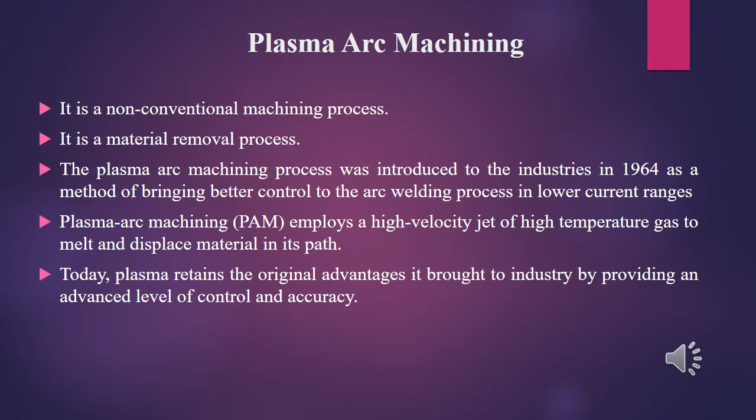The plasma arc machining process was introduced to the industry in 1964. It uses a high velocity jet of high temperature gas to melt and remove material from the workpiece. Due to its high control and accuracy, it has an advantage over many other machines.

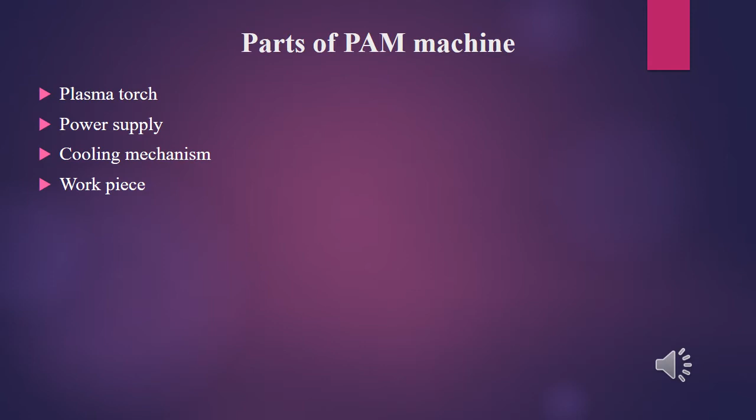Plasma arc machine has four main parts. First is the plasma torch, second is the power supply and cooling mechanism, and last is the workpiece. So we will look one by one at the detail of these parts.

As we are discussing plasma arc machining, we have to know how the generation of plasma happens in this process. We know that for the generation of plasma we need high enough energy. This high enough energy can be brought by an electric arc that can be produced by a plasma torch. The construction of the plasma torch is such that it can provide an electric arc between an electrode and the workpiece. We insert some gases that can be ionized, like nitrogen, argon, hydrogen, or a mixture of these gases. The plasma arc ionizes these gases and produces the high temperature plasma state in this process.

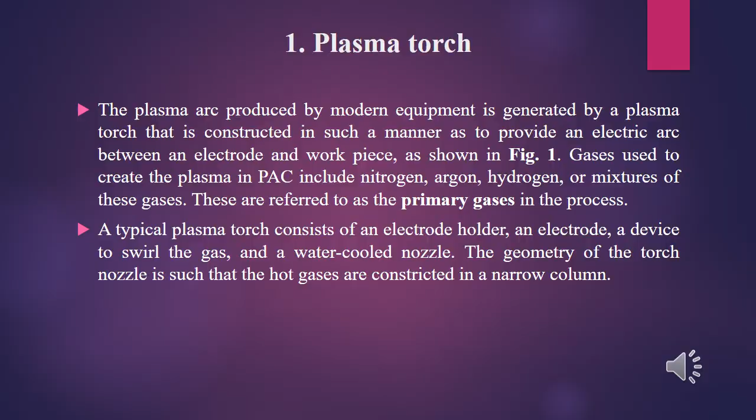A typical plasma torch consists of an electrode holder and an electrode, a device to swirl the gas, and the water cooled nozzle. The geometry of the torch nozzle is such that the hot gases are confined in a narrow column. The advantage of this constriction of the hot gases to a confined column is that it can increase the intensity of the plasma state, which is beneficial for us.

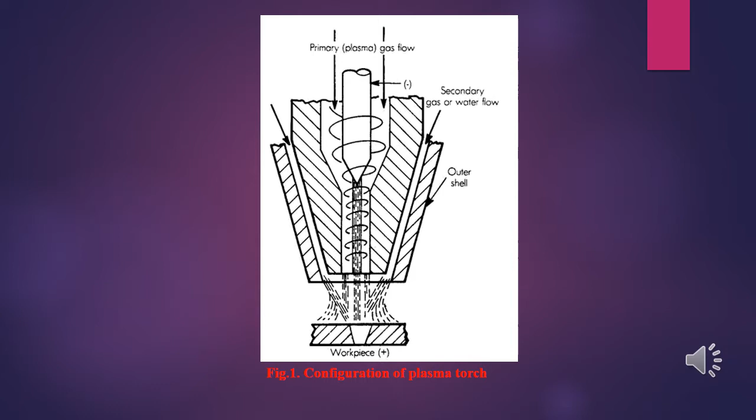This is the simple configuration of a plasma torch. We can see here an electrode used is a tungsten electrode, and there is a swirling action. Plasma gas flows in a swirl pattern around the electrode through the nozzle orifice, ensuring the proper arc attachment point. We have a primary gas and a secondary gas. There is an outer shell, and the intensity of the plasma beam can be increased by a constricted straight motion of the plasma.

The second part of plasma arc machining is the DC power supply. We know that a tungsten electrode is inserted in the plasma torch. So to create the plasma arc, we need a high enough potential difference. How is this potential difference created? We attach the negative terminal of the power supply to the electrode in the plasma torch, and the positive terminal of the DC supply to our workpiece. In this manner, we can generate a potential difference, and an arc can be produced between the electrode and the workpiece.

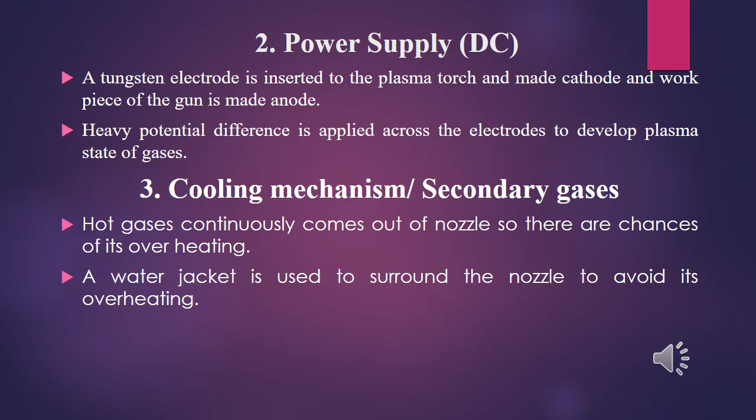The third part is the cooling mechanism. We can also say the cooling mechanism involves secondary gases, because as the hot gases continuously come out of the nozzle, there are always strong chances of overheating. So we can use a water jacket or any other cooling gas to surround the nozzle to avoid the overheating.

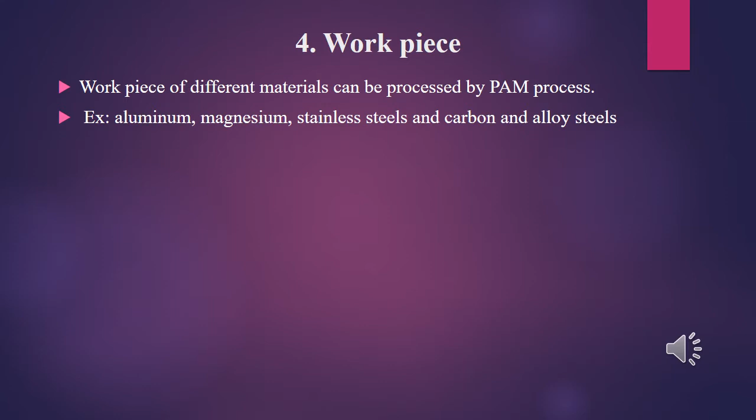Plasma arc machining can be used for different materials like aluminum, magnesium, stainless steel, and carbon and alloys.

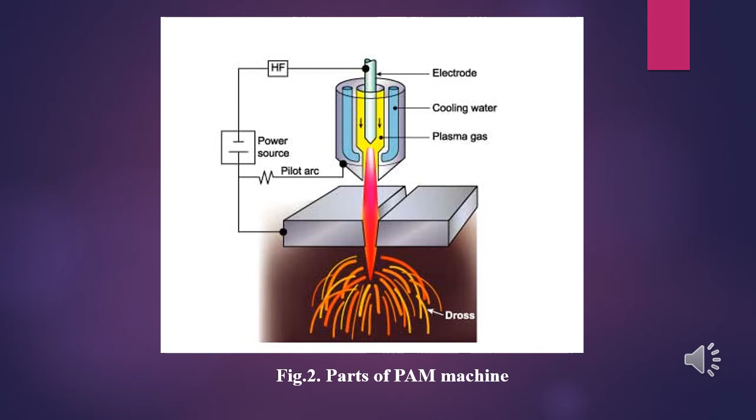In this figure, all parts of the plasma arc machine are shown. There is an electrode, then there is cooling water used to avoid overheating, a plasma gas known as primary gas for the creation of plasma, and a DC power supply which is necessary for the production of the plasma arc.

As far as the working principle of plasma arc machining is concerned, it uses the plasma state of gases to melt the workpiece. In this process, gases are so much heated by the plasma arc that they convert into the ionized state called plasma state. As the plasma state has very high temperature, this temperature is enough for every metal to be cut or separated from the workpiece.

Moreover, the plasma arc machine works on the computer numerical controlled system.

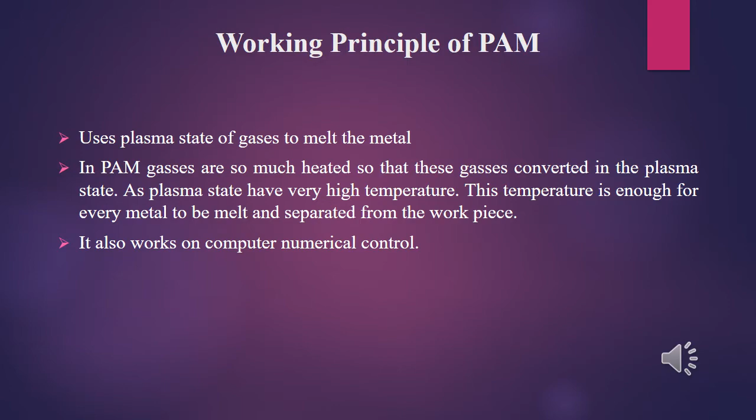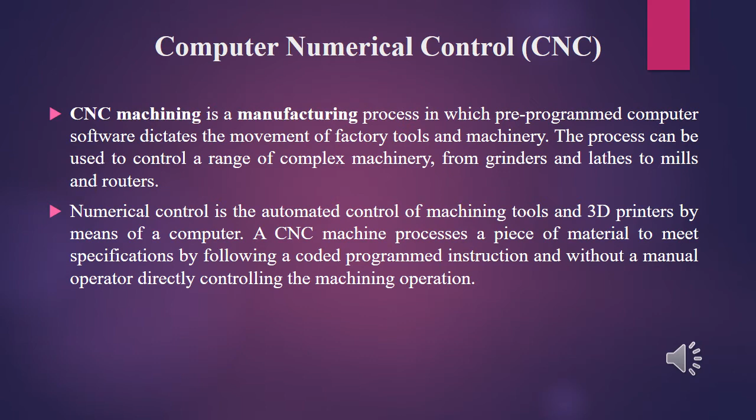A computer numerical control system is a manufacturing process in which we design software, and we dictate the movement of factory tools and machinery by this software. This process can be used to control a range of complex machinery. The numerical control machine processes a piece of material to meet specifications by following a code programmed by software, and without a manual operator directly, a person can control the whole machine and all its parts through a CNC program.

Now we will look at how the whole process proceeds. We have a DC supply. We connect the negative terminal of the supply to the electrode in the plasma torch, and the positive terminal of the DC power supply to the workpiece to make it anode.

By doing this, we apply a potential difference to create a plasma arc between the electrode and the workpiece. This plasma arc ionizes the gas that we injected in between the electrode and the workpiece, and this ionization caused the generation of the plasma.

The plasma is highly energetic and of high temperature. This plasma state melts the metal and discharges it through a pipe-shaped kerf. This kerf is a pipe-shaped tube which is used to separate the molten metal that we have to remove from the workpiece.

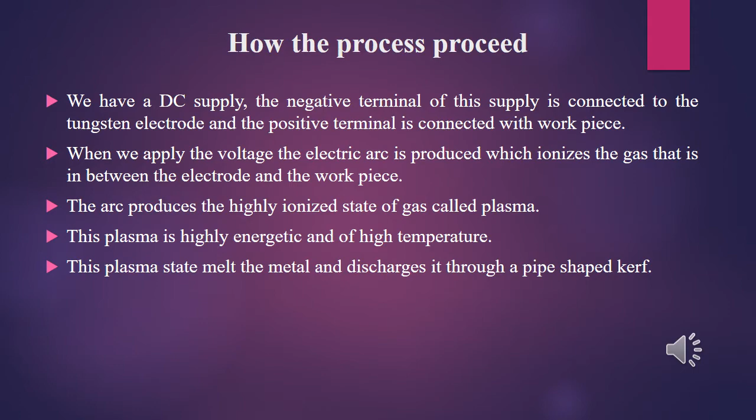While performing functions on the plasma arc machining, we must be aware of the following parameters. Number one, there must be high enough voltage across the electrode and the workpiece to generate the electric arc. The gas used for the production of the plasma state has very significance. The gases mostly used are nitrogen, argon, hydrogen, or a mixture of these gases.

Number three, there should be some specific standoff distance. It should neither be too large nor too small. The standoff distance is the distance from the electrode to the point on the workpiece where we need to remove the excessive material.

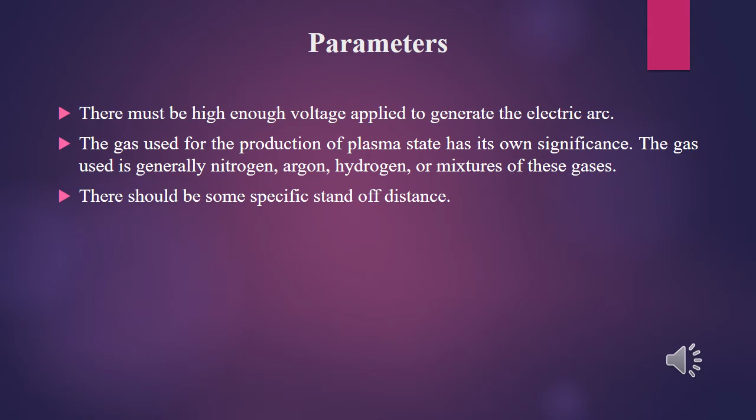From this diagram, we can understand how the process goes on. The potential difference is applied to the tungsten electrode and the workpiece. Then the primary gases are injected and the arc is produced to create the plasma. The plasma is constricted in a straight motion, and separates the excessive material that we need to remove from the metal workpiece.

There is a pipe-shaped kerf down the workpiece that is used to carry the molten metal removed from the workpiece without causing any damage.

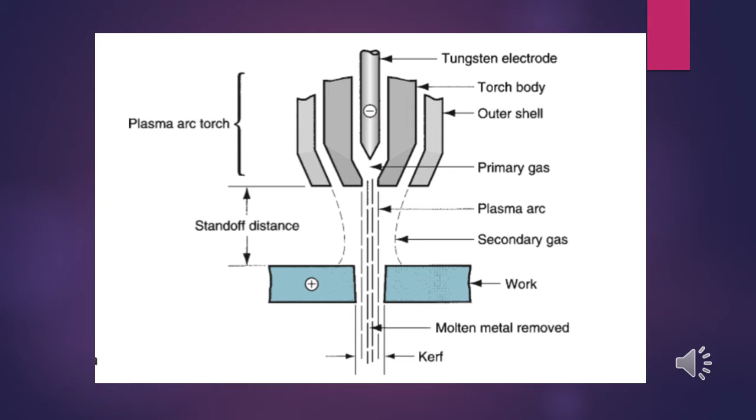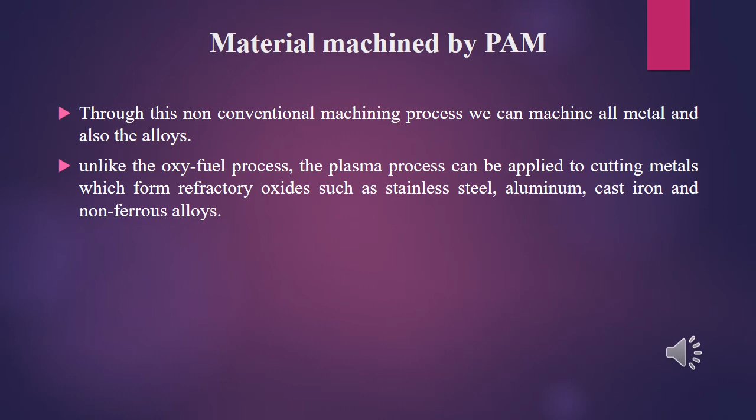By this plasma arc machining, we can machine all metals and also alloys. Unlike the oxy-fuel process, the plasma process can be applied to cutting metals which form refractory oxides, like stainless steel, aluminium, cast iron, and non-ferrous alloys.

There are four major types of plasma arc cutting: conventional plasma arc cutting, air plasma arc cutting, dual flow plasma arc cutting, and underwater plasma arc cutting. We will look at all these four types one by one.

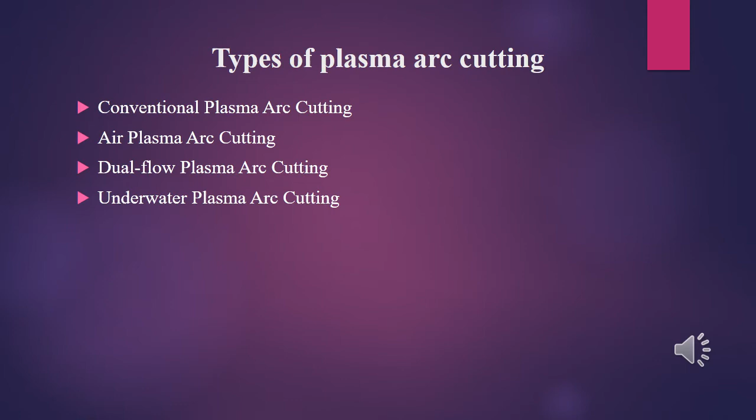In conventional plasma arc cutting, the arc is constricted by a nozzle only, and there is no use of shielding gas. Cutting gas that is used is tangentially injected to the electrode. The swirling action of the gases causes the cooler portion of the gas to move radially outward forming the protective boundary layer on the inside of the nozzle bore. By doing this, we can prevent damage to the nozzle and extend its life.

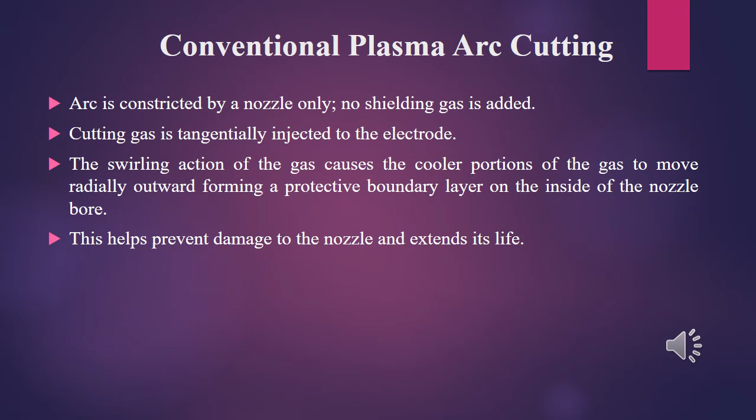In plasma air cutting, it was introduced in the early 1960s for cutting mild steel. Oxygen in the air provides additional energy from the exothermic reaction with molten steel, boosting cutting speed by about 25%. This process can also be used to cut stainless steel and aluminum. The cut surface will be heavily oxidized due to the oxygen in the air, and thus can be unacceptable for some applications.

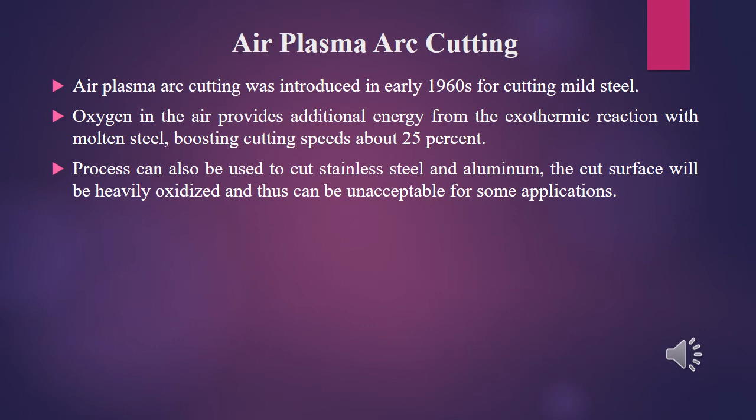Dual flow plasma arc cutting is a slight modification of conventional plasma arc cutting. A secondary shield gas surrounds the nozzle, while the cutting gas is usually nitrogen. The shielding gas is selected according to the metal being cut. Cutting speeds are slightly better than conventional plasma arc machining on mild steel, but the cut quality is not acceptable for some applications, cutting speed and quality on stainless steel and aluminum are essentially the same as with conventional plasma arc cutting.

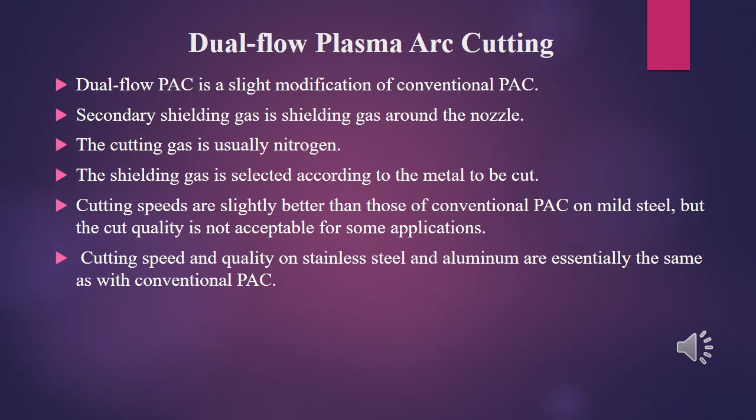Underwater plasma cutting is suitable for numerical control shape cutting and produces a noise level of 85 decibels or less under normal operating conditions. In comparison, conventional plasma cutting typically produces noise levels in the range of 105 to 115 decibels. Underwater cutting also nearly eliminates ultraviolet radiation and fumes, which is a positive aspect of this process. The steel plate being cut is supported on the cutting table with its top surface 2 to 3 inches under the water—that is why it is called underwater plasma.

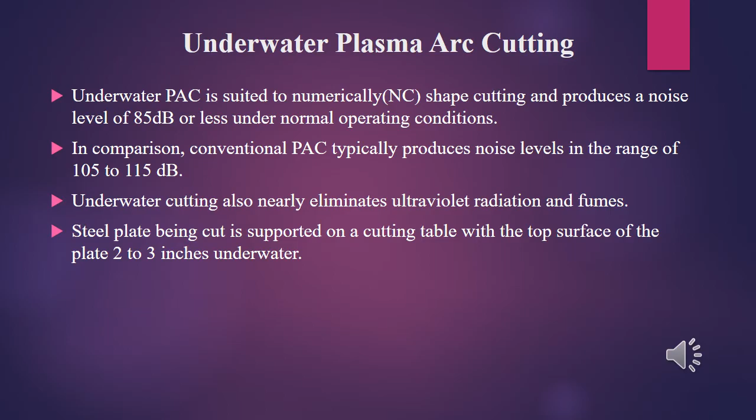As far as the application of plasma arc machining is concerned, it is chiefly used to cut stainless steel and aluminium alloys. It can be used in tube mill applications, welding of cryogenic, aerospace, and high temperature corrosion resistant alloys. Nuclear submarine pipe systems can also be prepared by plasma arc machining. Welding steel rocket motor cases is also an application, as is welding stainless steel tubes and titanium plates up to 8 millimeter thickness. Above all these applications, there is a huge circle of applications for plasma arc machining.

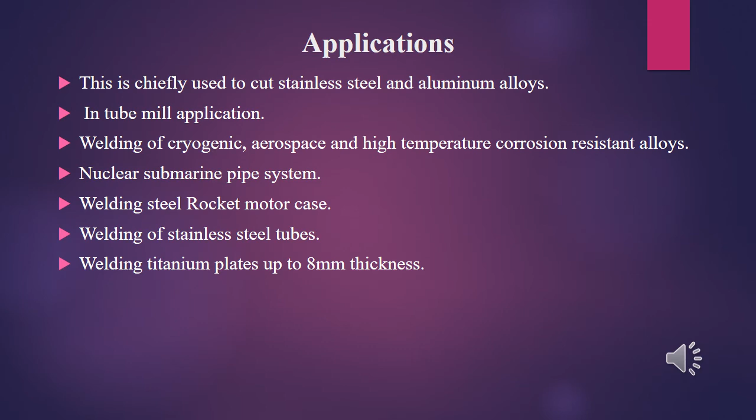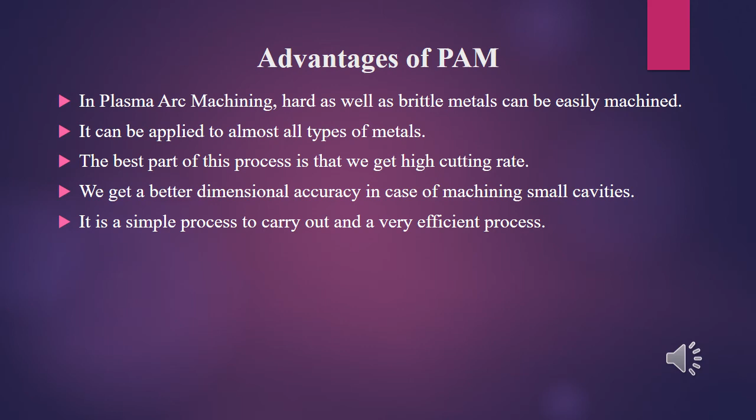Here are some advantages of plasma arc machining. First, hard as well as brittle metal can be easily machined, and it can be applied to almost all types of metals. The best part of this process is that we get a high cutting rate—that is the big advantage. We get better dimensional accuracy when machining small cavities by confining or constricting the motion of the hot gases. The last advantage is that it is a simple and very efficient process to carry out, made efficient through the computer numerical control system we discussed before.

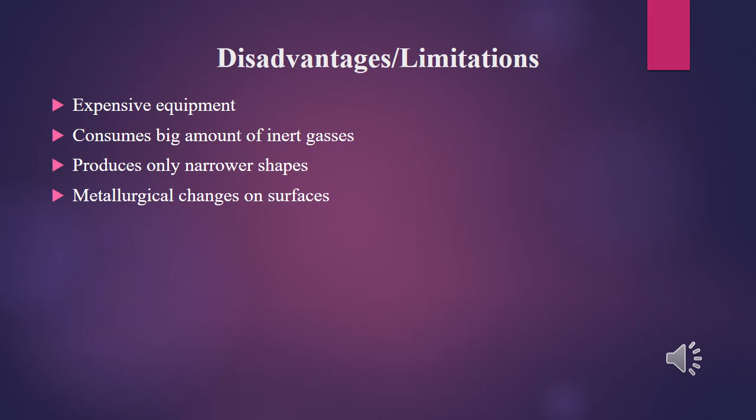As far as the disadvantages or limitations of plasma arc machining are concerned: it is an expensive equipment process, it consumes a large amount of inert gases, it produces only narrower shapes, and the last one is metallurgical changes on the surface.

Here is a point I have concluded from this presentation: in this latest field of technology, while performing welding and machining, plasma arc welding and machining have had huge success over all other processes. Due to its improved weld quality and increased accuracy and weld output, it has been used for precision welding, from surgical instruments to automatic repair of jet engine blades. But due to its high equipment expense and high production of ozone, it has been outnumbered by other advanced welding equipment like laser beam welding and electron beam welding. To overcome this problem, it is expected that soon it will be fetched with minimum currents.